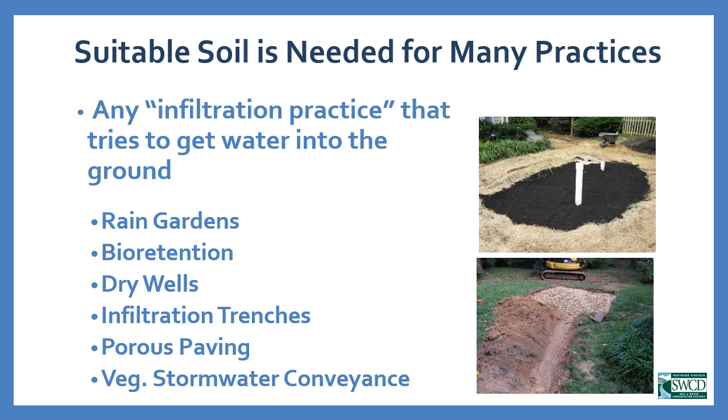The problem we find in this area is that many of our soils are not particularly well suited, for a variety of reasons. One of the most common is density. In urban areas, all urban areas, not just ours, we generally tend to have a lot of dense, compacted soil because that soil has been graded, run over by heavy machinery, and packed back down. What results is a very dense material that will allow some water to pass through, but generally at a much slower rate than the natural soil that was there before development.

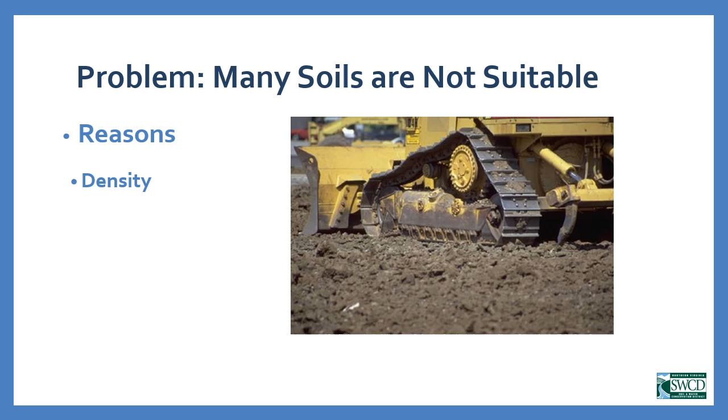Certain areas have very shallow bedrock, meaning you don't have to dig down very far from the surface in order to hit that rock. This can be a real problem if you want to build a rain garden or a dry well, because you need a certain distance of soil that the water will pass through in order to be properly filtered. If you have bedrock within a couple feet of the surface, you won't get that necessary distance.

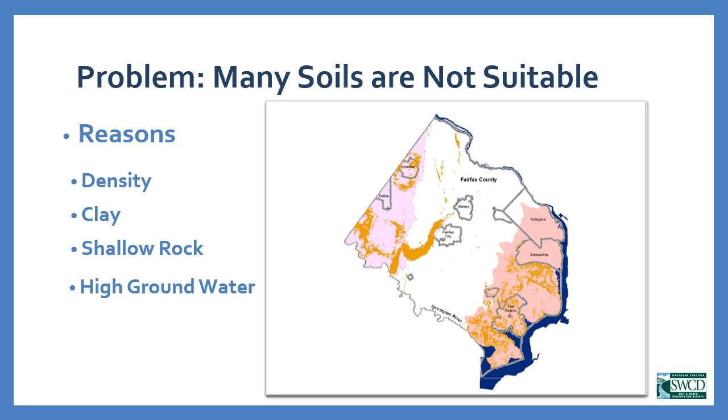We also have high groundwater. In the southeastern areas of the county, in basically all of the city of Alexandria and in a good portion of Arlington, you will find wide swaths of area that have shallow groundwater. You only have to dig down a couple feet in order to see saturation. Because you need the surface runoff to percolate through several feet of good dry soil first, that makes these wet, high groundwater soils not particularly well suited for rain gardens, dry wells, or porous paving.

You also have areas of flooding. These would be areas around our major streams, within the floodplains next to those streams. After every heavy rain, you might have surface water rushing over the surface in large volume at a high speed, and obviously this is a really bad spot to put a rain garden or a dry well.

Again, with all of these things I'm showing on the map, I'm showing some specific areas where you are very likely to find these problems, but that's not to say these are the only areas where you'll find problems with density, clay, shallow rock, high groundwater, or flooding. It's also not to say you can't find a suitable area within the city of Alexandria, for instance, for a rain garden. Maybe you will find that dry soil. So this is a very general map.

There, of course, are going to be exceptions to this map, both in the positive direction and in the negative direction. But generally, this gives you an idea of some of the problem areas that we have within Northern Virginia. And this should also give the idea that a rain garden, a dry well, a bioretention, an infiltration trench really has to be sited correctly in order to work. There's a lot of limitations out there that will make a site not particularly well suited for any one of those practices.

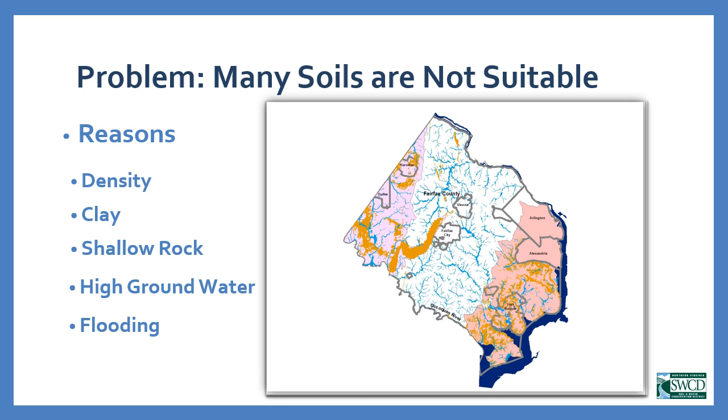So what do you do if you have a client that comes to you and is interested in an infiltration project, like let's say a rain garden? Well, you really do have to examine the site to determine if a rain garden would really work for them. And there's 3 steps to this examination.

Step 1 is to use the soil maps to figure out what soil types are mapped on their property and whether those soil types are indeed suitable for that rain garden.

Step 2 is to observe the site. Head out to the site, look around, look at the topography, look at where water is flowing, where it's pooling, and that'll help you narrow down potentially good areas on the property for that rain garden.

And then finally, there's step 3, field verification. Once you've narrowed down those potentially good areas through observation, you need to start digging. Pull out the shovel, pull out the auger, pull out the post hole digger, and actually take a look at the soil in the field to see if it truly is suitable for that rain garden.

You'll notice I put a big asterisk next to the title of the slide. That's because in many, if not most cases with the VCAP applicants, these 3 steps will be done for you before you even get on the scene. Because when a new VCAP applicant first starts out in the VCAP application process, the first thing that they submit to our office is a site visit request.

In that site visit request, they will say what kind of projects they're interested in. We will then look up the soil maps, the soil type on their property to determine if the soils that are mapped there are indeed suitable for the projects that they have an interest in.

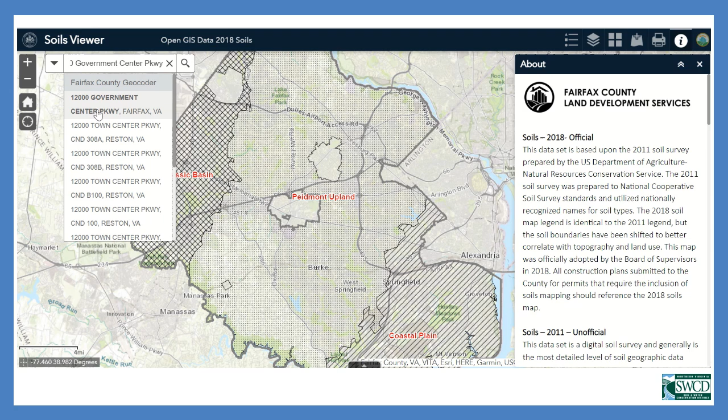Basically, what you want to do at this point is type in the address for your client in the top left here. I'm going to use as an example the Government Center complex, 12,000 Government Center Parkway. You can hit the little magnifying lens here or find the address in the drop-down menu, and it'll zoom right into there.

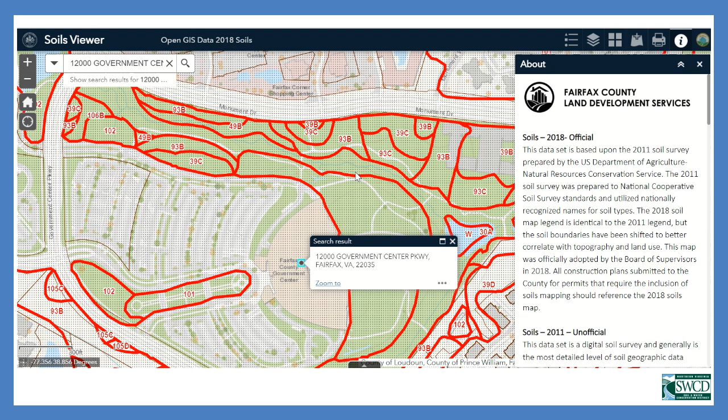And here we are at the Government Center. What you'll see on this map as I scroll around, all the thick red lines, those are the various soil types. So those red lines are actually the boundaries of the various soil types. Let me close out of this, minimize that. So you see we got soil type 102 right here. We got soil type 39C. We got soil type 93B.

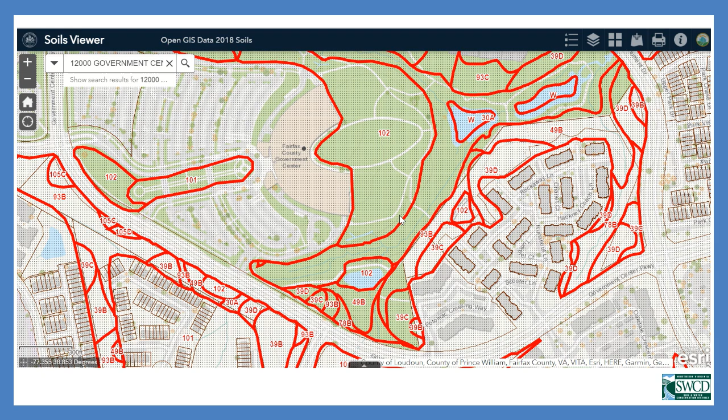So next what you want to do is zoom to the area that you are proposing as the site for that rain garden. Let's say, just for the sake of argument, that we were going to put a rain garden just below the driveway here, so right about there. When you click on the map, it'll bring up a series of little data tabs. Some of these will be the soils data you are looking for, some of them will not be. In this case, it brought up the general parcel report first.

I'm not interested in that, but you can see this is 1 out of 4 pages of data tabs. So all you have to do is just click this little arrow at the top, which will take you to the next. Here's our soils information. So if you don't see the soils information immediately, just click on one of those arrows at the top of the tab, and it'll eventually take you to the soils page.

So this is telling us that the soil type is 30A. That's the alphanumeric legend code. It doesn't tell us much. But to figure out what that soil type is, you click on the More Info button, the Description and Interpretive Guide to Soils. This will take you to a PDF that has a description of all the soil types mapped in Fairfax County, including soil type 30A. It'll have ratings tables, suitability tables, as well as just a little paragraph description of each of the soil types. We will click on that in a second, but the first thing I wanted to show you was the soil property rating down here.

We can click on the little arrow next to it, and it'll give us the soil's name. So soil type 30A in common English is Codorus and Hatboro soils. Still doesn't tell us all that much, so we still have to click one more time, and it'll bring up a little bit of a data table. So again, the soil name, Codorus and Hatboro. The soil number is 30, as we saw. It tells you such things as the problem class, the soil's hydrologic group, the surface K erosion factor, things that probably are not of much use or interest to you. But if you scroll down, you will find some interesting stuff.

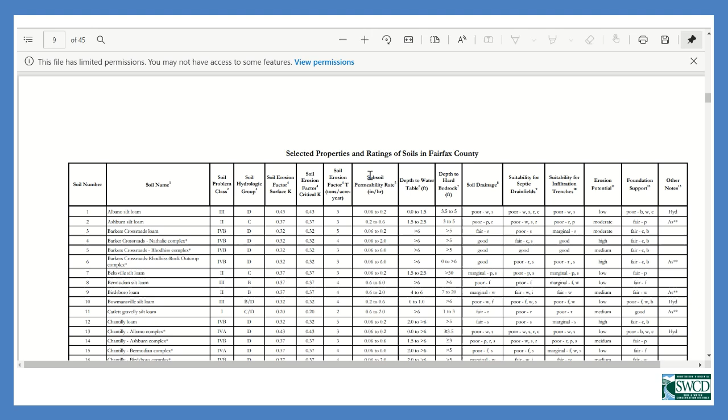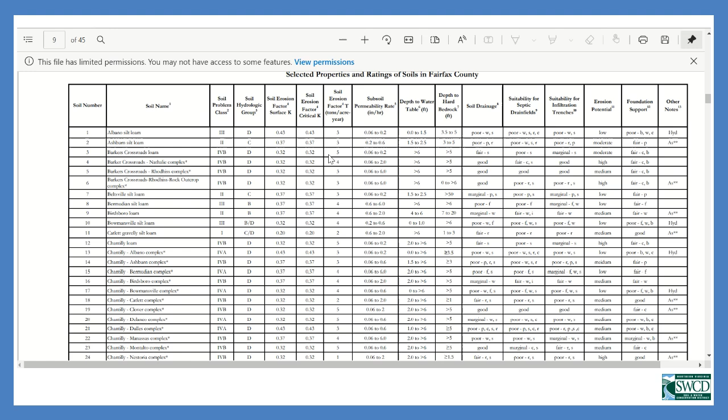This will take you to a pretty long PDF, called the Description and Interpretive Guide to Soils in Fairfax County. The first couple pages tell you a little bit about the soil maps, the soil survey, how they were made, the general geology of Fairfax County, the physiographic provinces, which are different areas of unique geology. And then you get to this big data table, which shows all of the soil types mapped in Fairfax County. If you remember, the one we were looking at was soil type 30, Codorus and Hatboro soils.

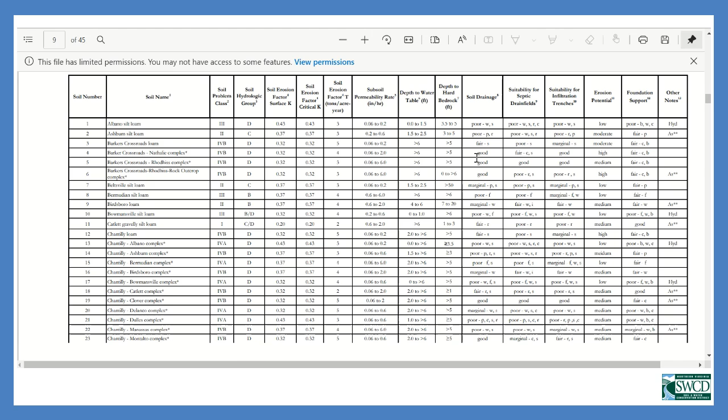All of this data right here is the same as what was pulled up on that data tab. So for instance, depth to the water table, 0 to 2 feet. Soil drainage, poor. Suitability for septic drain fields, poor. Suitability for infiltration trenches, poor. Same stuff, here it's just showing it in the full data tab format.

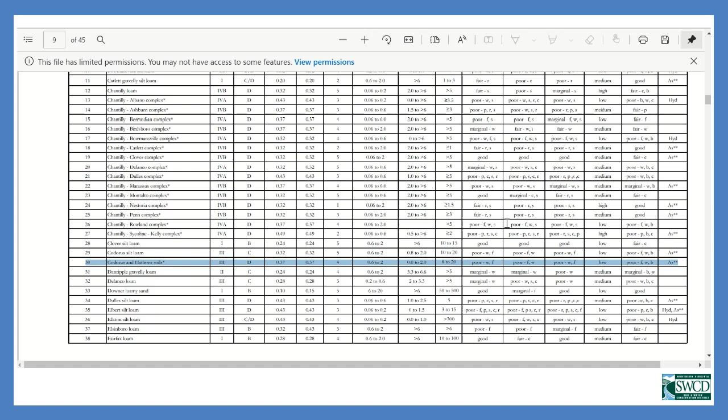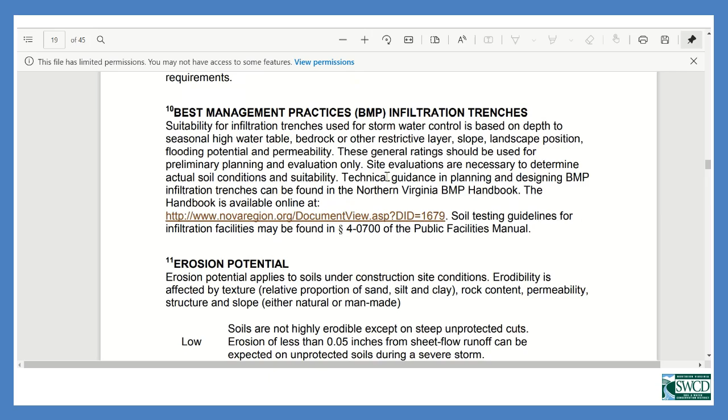If you scroll down from there, what you'll also find is a section of this guide which goes through and provides a short paragraph explanation of each of these soil types. So I'm going to scroll down to soil type 30. Here we are, Codorus and Hatboro soils.

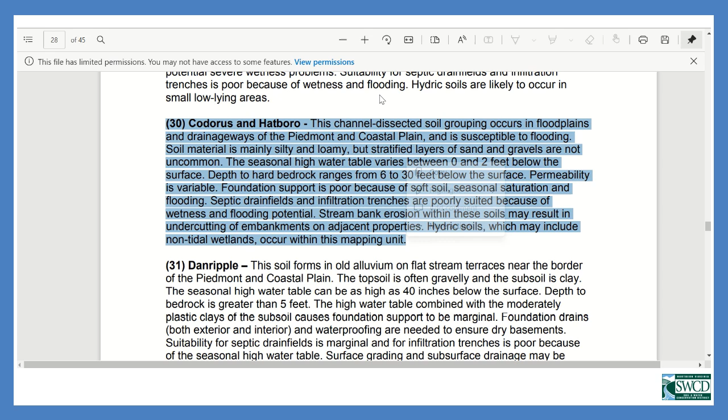Here's just in plain English, or as plain as we can make it, what this soil is about. This channel dissected soil grouping occurs in floodplains and drainage ways of the Piedmont and coastal plain and is susceptible to flooding. Soil material is mainly silty and loamy, but stratified layers of sand and gravels are not uncommon. The seasonal high water table varies between 0 and 2 feet below the surface. Depth of hard bedrock ranges from 6 to 30 feet below the surface. Permeability is variable. Foundation support is poor because of soft soil, seasonal saturation, and flooding.

Septic drain fields and infiltration trenches are poorly suited because of wetness and flooding potential. And there's some other stuff here, and the last sentence might be useful too: hydric soils, which may include non-tidal wetlands, occur within this mapping unit. So basically, if you're thinking of putting a rain garden here, what you are saying is you're thinking of putting a rain garden in a floodplain soil that may have non-tidal wetlands, a water table between 0 and 2 feet below the surface, and variable permeability, and it's susceptible to flooding.

This is not a suitable soil for a rain garden. And if you were looking through the soil maps before going out to see your client, you could pretty much say that there are so many red flags raised by this Codorus and Hatboro soil that you really wouldn't want to put a rain garden, an infiltration trench, or a dry well anywhere close to here. So this is kind of an extreme example, but it does show you what the soil maps can tell you about the soil before you even make it out to the client's property.

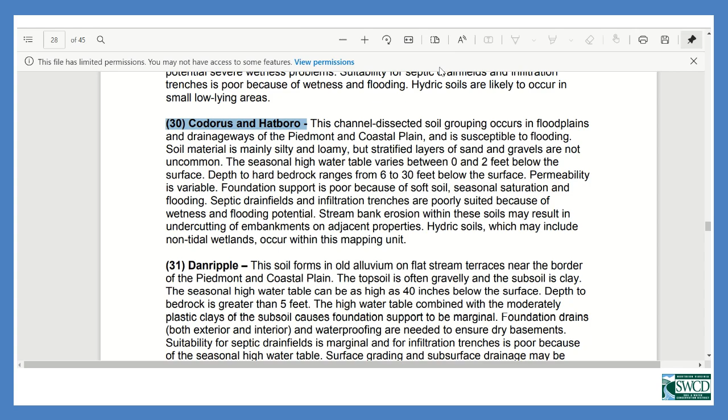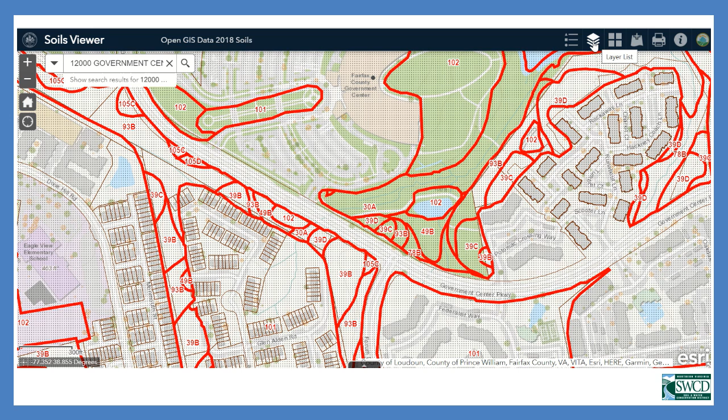As you're working your way through the soils viewer, one other thing to note is that in addition to the basic layers that are automatically loaded when you open the soil survey, you can put more layers on right here. If you click this button, this is the layers list—kind of looks like a sandwich stacked on top of each other.

Here you can see we've got the official 2018 soils maps pulled up, but we also have some of the older ones as well, historic soils maps. So if you wanted to see what was mapped in 2011 or 1990, you can.

There are some other subsets of the soil map which might be useful to you. If you wanted to see areas that used to be mapped as marine clay—areas that have a really sticky, shrinking, swelling type of soil—you can turn that on.

Other areas that have shrinking, swelling, sticky clays but are not marine clay, we've got a layer for that. Then we've got Marumsco soils, which are basically the current name of marine clay. So to see where marine clay is currently mapped, click on the Marumsco soils.

There's an area of the county where there's some potential natural asbestos in the bedrock. You can click on that to see where that would be located—all things that would be useful to know before you start digging.

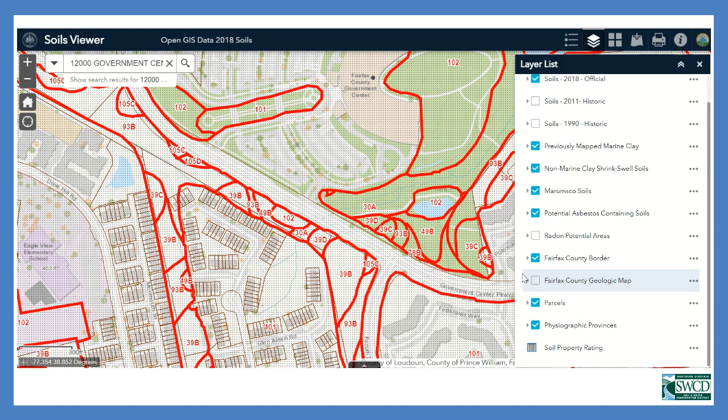It looks like none of those layers are pulling up right here, so obviously none of those types of soil are mapped on the government center property, but they are mapped in other parts of Fairfax County. So that, in a nutshell, is how to use the soils viewer, and I hope it's fairly easy and fairly intuitive.

Now that you have the basic soils information, you can proceed to step 2, which is to make observations of the site. While on site, one thing I always look for is the presence of standing water.

This is often a spot where clients want to put a rain garden, a dry well, or an infiltration trench. Intuitively, it makes sense—where the soil is wet, you'd think you want to put down an infiltration trench to help dry the soil out. But actually, areas of standing water are often the worst spots for an infiltration practice, because that standing water is standing there for a reason.

Maybe the soil is very compacted in that area and just not porous enough to allow storm water to quickly pass through. Maybe it's at a low spot on the yard and perhaps you have a little bit of groundwater coming to the surface.

So oftentimes when you see standing water, that really is not a good place to put a rain garden or a dry well. Take a look at the standing water, ask the client, ask yourself: how long does it stand there? Is the grass stained? Is the vegetation dead? These are both signs of prolonged saturation.

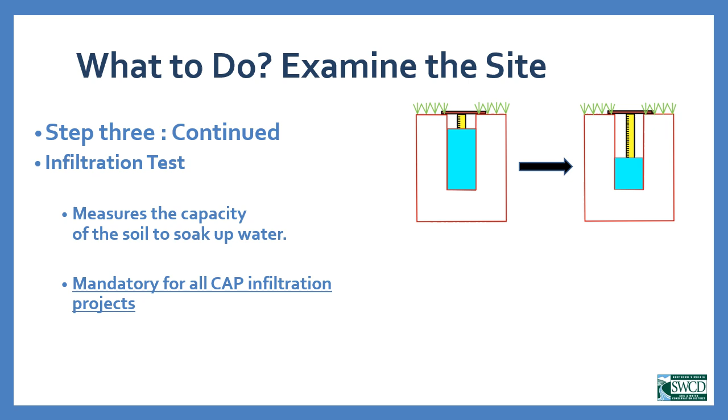Next, we move on to part 2 of the field verification, which is the infiltration test. An infiltration test is a simple test that determines the ability of the soil to absorb water. Conducting an infiltration test is mandatory for any of the infiltration projects that the Conservation Assistance Program can fund.

These projects include rain gardens, permeable pavements, dry wells, infiltration trenches, and bioretention facilities. Basically, if the project temporarily stores stormwater and soaks it into the ground, you have to conduct an infiltration test first, which will determine if the site is really suitable for this type of project.

An infiltration test is quite simple, but it's time consuming. You dig a hole, fill up the hole with water, and then every hour you measure how quickly that water drops. The depth of the test is determined by what type of practice you're hoping to install.

For shallower practices like rain gardens and permeable pavements, the test hole only has to be 12 to 18 inches deep. For deeper practices like dry wells, infiltration trenches, and bioretention facilities, the test hole should be 24 to 36 inches deep. Generally speaking, it's the homeowner or property owner that conducts the test, meaning observes the water and takes the measurements.

We do want to see test data over a 5-hour span, and generally speaking, contractors just don't have that time to spend at their client's property. What we do see, though, is sometimes a contractor will help their client prep the test, meaning dig the hole, especially for some of these deeper tests, like for the dry well or infiltration trench. Some homeowners are not capable of digging a 24 or 36 inch deep hole, so they may rely on their contractor to do that work for them.

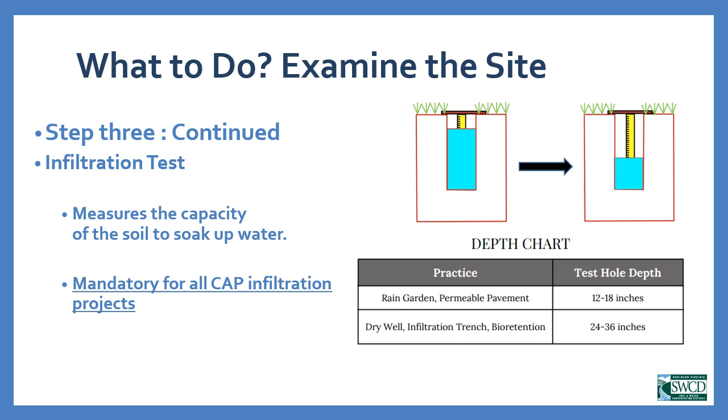Once the hole is dug and filled with water, the homeowner or property owner will take the measurements, the actual infiltration readings. We provide them with a data sheet to fill out. The first thing they fill out is the depth of their hole. In this case, assuming they're putting in a rain garden or permeable pavement, the hole is only 18 inches deep. Moving to the first data column, time.

In the time column, the homeowner puts down the time the infiltration measurement was taken. What is the infiltration measurement? It's basically the distance from the top of the hole to the surface of the water. So the next column is that actual measurement, the distance from the top of the hole to the surface of the water.

In this example, the homeowner took their first reading at 12:30 in the afternoon, and the water was sitting 4 inches from the top of the hole. The next reading was at 1:30, and the water was 6¼ inches from the top of the hole. An hour later at 2:30, it was 7½ inches. An hour later, 8½ inches. An hour later, 9¼ inches, and finally at the last hour of the test, it was 10 inches from the top of the hole.

This is the data that the homeowner or property owner will collect. They send that raw data to us, and the last two columns of the test we calculate ourselves. It's simple math, but for quality control and consistency purposes, we like the homeowner to send their raw data to us so we can determine the drop from hour to hour, the drop in water depth, and finally the infiltration rate, taken as inches per hour.

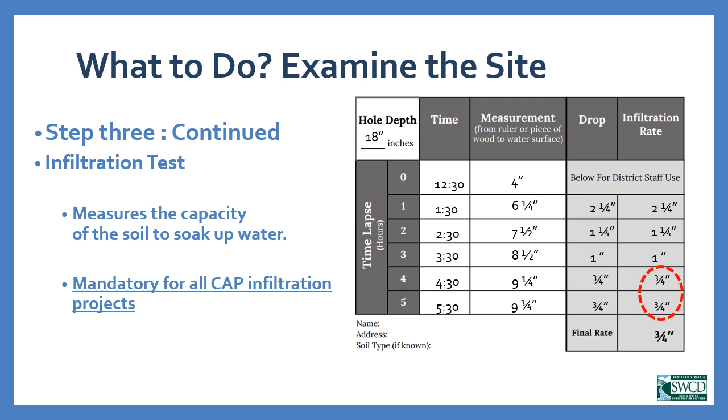Now, every now and then, we don't see a steady state rate. Let's take this example: say in hour 5, instead of measuring 10 inches, our homeowner measured 9¾ inch. That means for the last hour of the test, the drop was not 3/4 inch, it was just 1/2 inch, which also means, since it was a measurement taken over an hour's increment, the infiltration rate for that final hour was also 1/2 inch per hour.

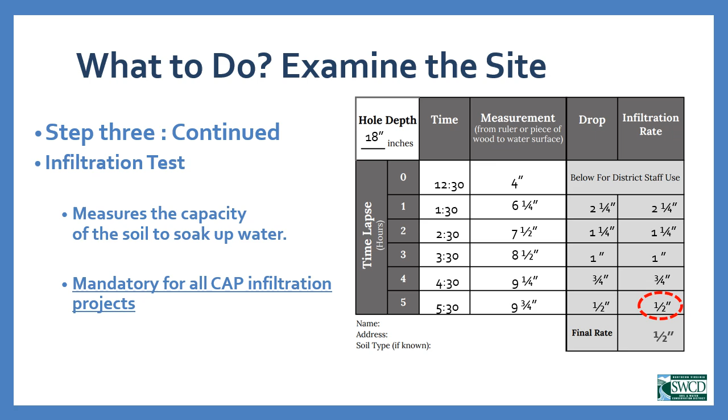Now you can see we don't have a steady state anymore. The infiltration rate continues to drop throughout the duration of the test. If you see something like this, where the test rates do not steady out towards the end, what we do is look for our slowest rate, which is almost always the last hour of the test. Our slowest rate in this case was 1/2 inch per hour. So for this instance, we would set our final rate as that slowest hourly rate, or 1/2 inch per hour.

How do you conduct an infiltration test? Well, you dig a hole with a shovel or a post hole digger to the prescribed depth. For rain gardens and porous paving, that's 12 to 18 inches of depth. For dry wells, infiltration trenches, and bioretention facilities, the hole should be 24 to 36 inches of depth.

Once the hole is dug, you pre-soak it, meaning you fill it up with water. You sit and wait until that water has completely drained out. This saturates the soil at your test site, and you want saturated soil before you take your actual infiltration test measurements.

Next step is to do the actual test itself. You refill the hole, and then over the next 5 hours, you measure how quickly each and every hour that water level drops, how far that water level drops per hour over that 5-hour period. Again, it's generally the homeowner or property owner that takes these readings, but sometimes they'll ask for their contractor's help in prepping the site, digging the hole for them so that they can take those readings.

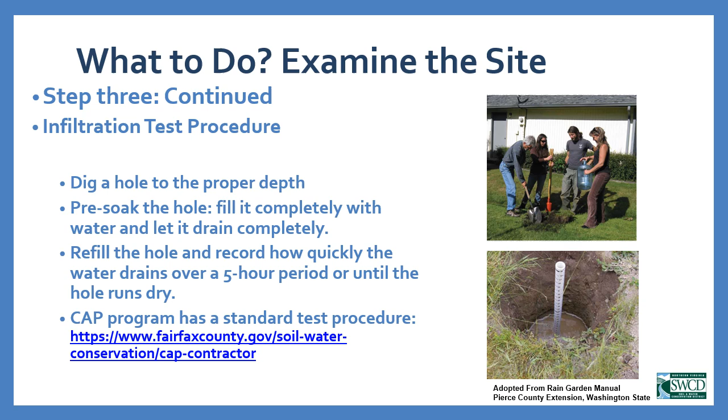The Conservation Assistance Program does have a standard test procedure for setting up the infiltration test and taking the measurements. You can find those standard procedures at www.fairfaxcounty.gov/soil-water-conservation/cap-contractor. On that web page, we have both written instructions and an instructional video, which will walk you step by step through the infiltration test procedures.

So now you've got results. You've got infiltration rates. You've got an analysis of the soil to see if there's any obvious problems like shallow bedrock or shallow water table. What do these results mean?

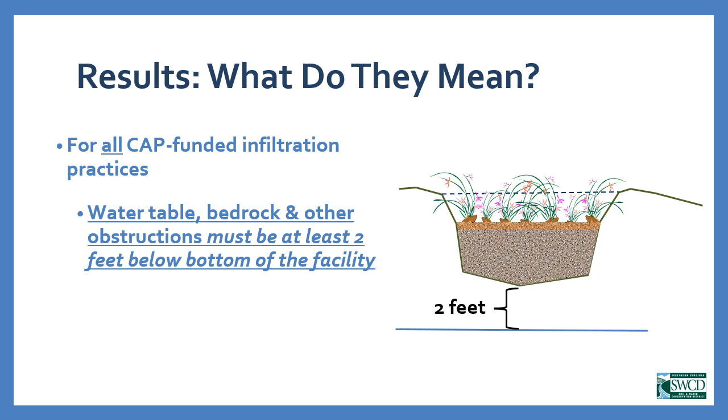We do have design standards for VCAP that apply to all of the infiltration practices, rain gardens, dry wells, etc. So for all VCAP funded infiltration practices, we require at least a 2-foot separation from the bottom of that rain garden, dry well, trench, or porous paving to the top of the bedrock or groundwater. You have to have 2 feet of good dry soil between the bottom of your infiltration facility and the top of the bedrock or groundwater.

For your infiltration results, if you are designing and installing a dry well or an infiltration trench, you need an infiltration rate of at least 0.5 inches per hour. Now there is a little bit of wiggle room on this standard if you're installing an infiltration trench, because if you're slightly below 0.5 inches per hour, you can still install an infiltration trench as long as you also have an underdrain installed.

An underdrain is sort of a perforated overflow drain pipe that is installed either in the center or in the bottom of the infiltration trench, which will allow excess water to drain out during a big storm when that trench is completely filled. So slightly below 0.5 inches per hour is still all right for an infiltration trench, but below that level you are required to install an underdrain. For your dry well, 0.5 inches per hour is a hard and fast rule. If your infiltration rate is below 0.5 inches per hour, you cannot put in a dry well because dry wells are not allowed to have underdrains in them.

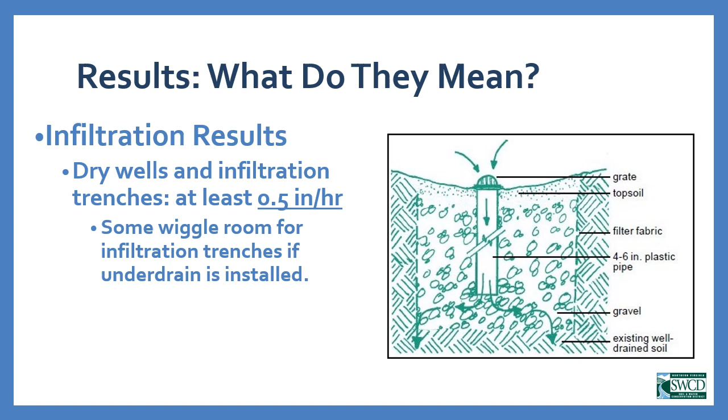If you are thinking of installing porous paving or a bioretention, and a bioretention is just one of those big, fancier, more formally designed rain gardens, you have to install an underdrain if the infiltration rate is below 0.5 inches per hour. So unlike the dry well, you can put in porous paving or bioretention in soil with infiltration rates below 0.5 inches per hour, but below that rate you are required to put in that perforated underdrain. If the rate is significantly below 0.5 inches per hour, you have to use your professional judgment to determine if this really is a suitable site.

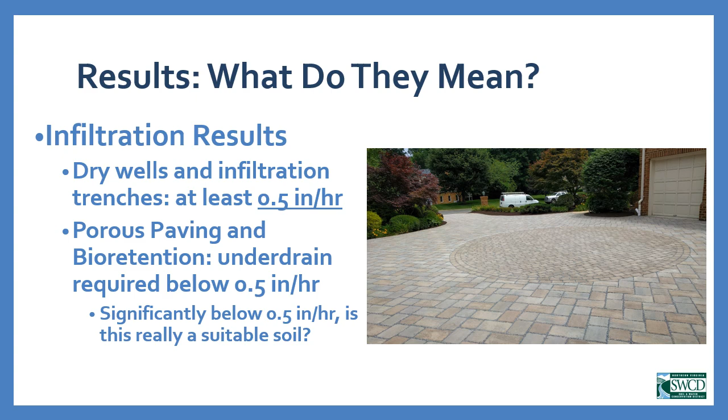Certainly for porous paving, I'd say you can go a little bit lower if you have really slowly permeable soils. Porous paving may still be a pretty good option for those soils. But for a bioretention, you have to consider, if you're dropping down to 0.2 or 0.1 inches per hour for your infiltration rate, is this really a good spot for a bioretention? There's no hard and fast rule to guide you. It's more just a matter of using your best judgment. Is this a project you would have confidence in?

For your rain gardens—which is probably next to dry wells, rain gardens and dry wells are probably our most commonly installed infiltration practices through the VCAP program—if your infiltration rate is greater than 0.5 inches per hour, the only thing you are required to do at a minimum is mix in or amend compost into the natural soil.

So basically you dig out the ponding depth at the top of your rain garden, you have the natural soil below that, and you till in compost to make it a little more permeable. That's if the infiltration rate is greater than 0.5 inches per hour. If it's between 0.5 and 0.25 inches per hour, you need to excavate out the native soil and replace it with engineered rain garden soil media—the commercially available mix you can buy from quarry companies or some of the larger nurseries around here. That stuff is very sandy and generally has a very high infiltration rate.

If you're getting infiltration rates that are really low, less than 0.25 inches per hour, you will need engineered soil media and an underdrain. Both of those are requirements for those slowly permeable soils. Or, again, use your best professional judgment and consider if this really is a good location for a rain garden. If you're getting 0.1 or 0.2 inches per hour, is that a site where you really should be putting a rain garden? Perhaps the answer is yes, but certainly ask yourself that.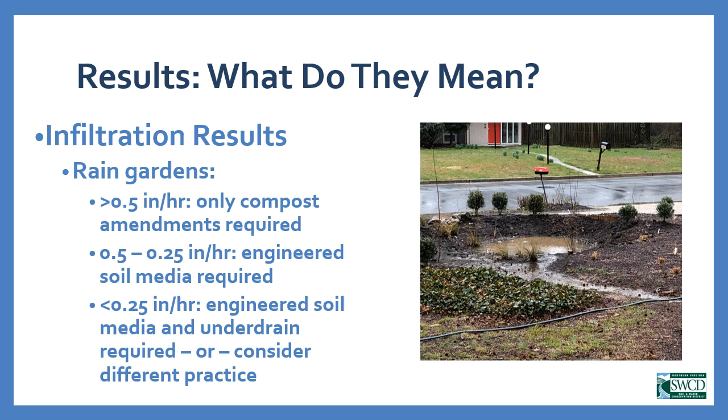And lastly, we have the dry swale. You may not be familiar with this one—it's not a project that has been too common through VCAP. We've seen a couple installed in the last year or so, and their popularity seems to be increasing. So it may be something you see in the future, or something one of your clients mentions to you.

A dry swale is basically a long linear rain garden that is meant to both soak up rainwater and convey stormwater from one point to the next, and it often has a few check dams along its length to help pool stormwater and allow it to soak into the ground. If you're considering a dry swale and your infiltration rate is greater than 0.5 inches per hour, the only thing required is to mix compost amendments into the natural soil to make it a little more porous. That's your only requirement at that point.

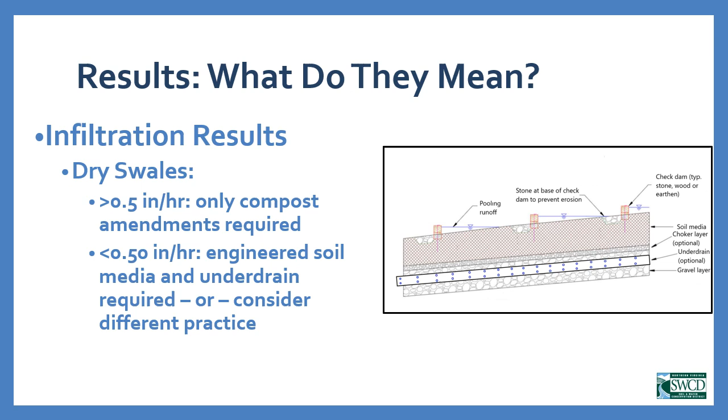If your infiltration rates are less than 0.5 inches per hour, a dry swale requires engineered soil media and an underdrain. You'll have to excavate and remove the natural soil, bring in that sandy engineered rain garden soil mix from a local supplier, and put a perforated underdrain down near the bottom of the practice. Again, if the infiltration rate is significantly below 0.5 inches per hour—0.1, 0.2 inches per hour, something like that—you do have to consider whether this is the right location soil-wise for that dry swale.

Whether it's a dry swale or any of the other infiltration practices I mentioned previously, a continuing theme is to always rely on your good professional judgment. So I've given you the basic minimum requirements for designing and installing these practices in soils of differing infiltration rates.

But if the site is making you nervous, if the infiltration rate is so low that you just don't have confidence that a rain garden, a dry well, a dry swale, or an infiltration trench would work well on this site, if some red flags are raised, then by all means bring that up with your client that you don't think this is a suitable soil for what they are trying to install. Remember, the VCAP applicant, the homeowner, is responsible for maintaining this project over 10 years, so you want to put in projects that will be easy for a non-technical homeowner to maintain over a decade. Always rely on your good professional judgment when dealing with slowly permeable soils.

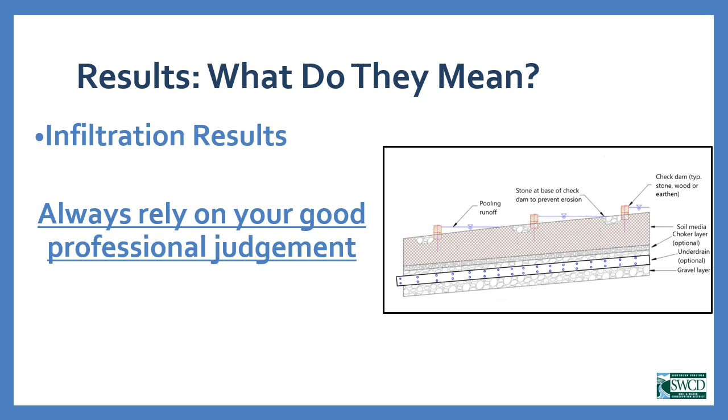For my last slide, I wanted to put up again some of those important links to information I mentioned earlier. The links to the Fairfax County digital soil maps, as well as instructions for running an infiltration test, can be found at the VCAP program page, with the URL shown below. All of the infiltration test minimums and design specs that kick in as a result of those minimums are also summarized on the infiltration test instruction PDF. So if you can't remember whether you have to put in an underdrain because you have a 0.6 inch per hour infiltration rate on your potential rain garden site, that information is included with the infiltration test instructions, all in one PDF.

If you are working in the city of Fairfax, the city of Alexandria, or any other jurisdiction outside of Fairfax County, the link to soil maps for just about every jurisdiction in the United States can be found at the U.S. Department of Agriculture's Web Soil Survey, with the URL shown at the bottom of the slide. Finally, if you're out at a client's property and something about the soil is puzzling you, feel free to contact me and I'll do my best to help. My email is dan.schwartz@fairfaxcounty.gov, and my desk number is 703-324-1422. Feel free to send those difficult soil questions my way.

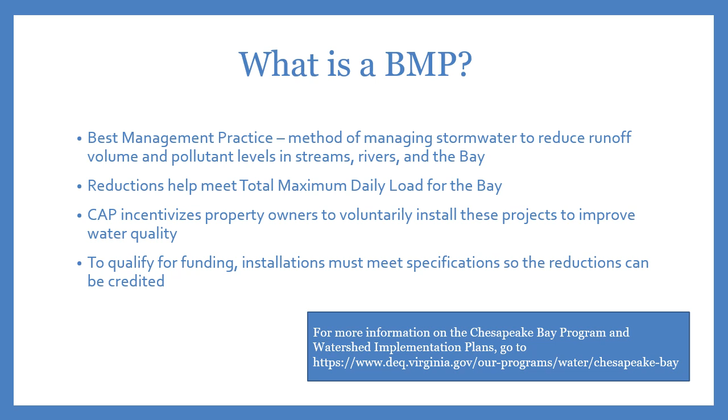A best management practice is a method of managing stormwater that reduces runoff volume and pollutant levels in our streams, rivers, and the Chesapeake Bay. States in the Chesapeake Bay watershed have to meet total maximum daily load goals, and BMPs are one way to do that. There are construction specifications for the BMPs described in the VCAP design manual, with additional information in the Virginia Stormwater Management Handbook, published by the Department of Environmental Quality.

There are 12 BMP types eligible for cost share through the Conservation Assistance Program. We're going to go over 6 of these in more detail, as they are the most common practices installed through the Northern Virginia Soil and Water Conservation Districts Program. More information about the other 6 can be found in the VCAP design manual. There are also training videos available for each practice type on the Virginia Association of Soil and Water Conservation Districts website.

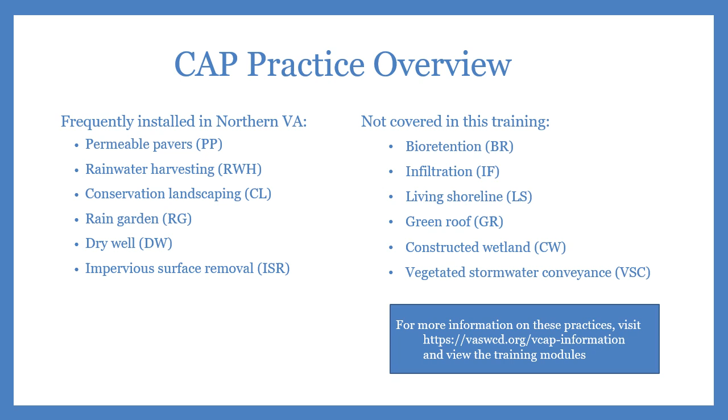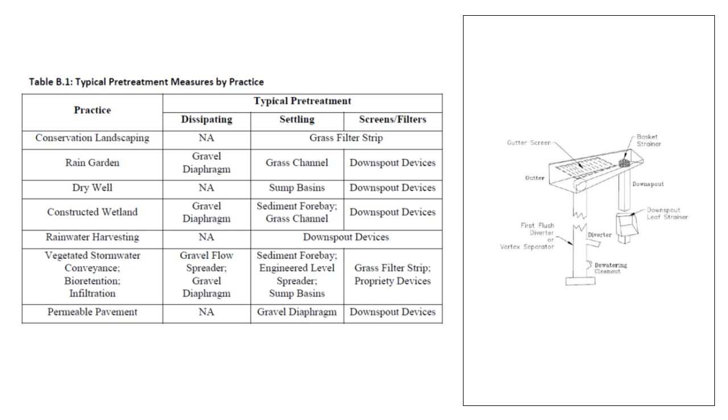In these practice overviews, you will see the term pretreatment mentioned several times. Pretreatment is a necessary component of many stormwater BMPs. Pretreatment techniques protect a BMP from the buildup of trash and sediment and dissipate the energy of the water as it enters the practice. If a BMP is sensitive to buildup of fine sediments, or if the drainage area will produce a lot of sediment, pretreatment will be required. There are 3 types of pretreatment: dissipators, settling devices, and screens or filters. Settling devices and dissipators are usually installed where runoff enters the BMP, while screens and filters are located on downspouts. The diagram on the right shows examples of downspout devices.

The first practice we're going to look at is permeable pavement. This practice is meant to help manage runoff by removing an impervious surface and replacing it with a pervious one. It can also be designed to capture additional impervious runoff from a nearby roof downspout by providing additional storage depth in the reservoir.

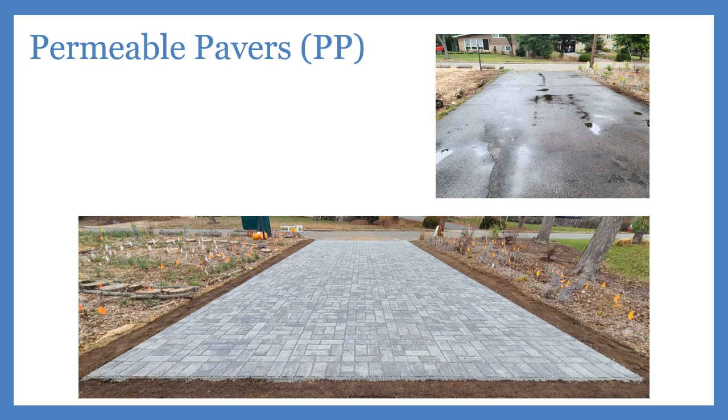Storage reservoir depth will be determined in part by the volume of runoff captured in a 1-inch storm, and also by the manufacturer's specifications for the product. For example, in a 1-inch storm, if you calculate the required storage depth being 4 inches, but the manufacturer requires 6 inches of reservoir for stability reasons, you have to go with 6 inches. Or the other way around, the manufacturer requires 6 inches, but you calculate 8 inches needed for capturing the 1-inch storm, you have to go with the 8-inch depth.

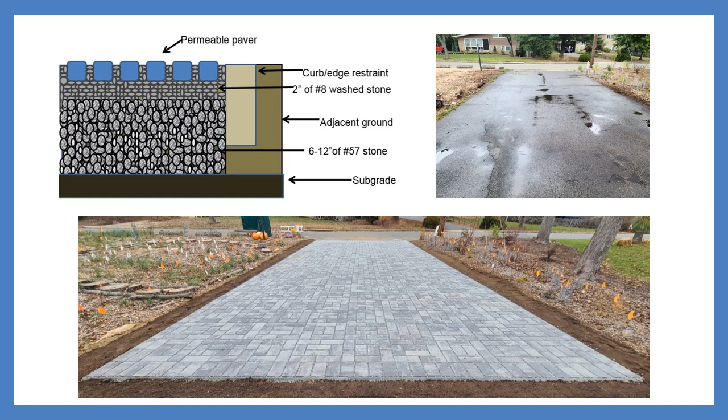This cross-section is an example of what needs to be provided with the design plan for the application, and be sure to label it with the actual depth of each gravel layer. The application requirements were covered in more detail in the first video and are on the submission checklist provided to each applicant, but I'll go over each of these very quickly.

The first one is a cross-section diagram with dimensions that we just saw earlier. For the infiltration test, we do need to see the individual timed measurements, not just that final number. Most of the time the property owner is doing this test, but if you are performing it for them, please be sure to provide us that data.

The design plan with the dimensions and area of the BMP - that area is an important one, often left off, and we do need to have that. Also needed: permits, the construction sequence and timing, and a soil stabilization plan, especially important if you're going to have soil that is not covered for more than just a few days. Also sizing calculations with the contributing drainage area map showing pervious and impervious area being treated.

For this one, you can use an aerial map and outline the contributing drainage areas - in other words, the roof or the driveway, and any pervious area that will be draining to it. We'll need that materials list, an itemized cost estimate, and a maintenance plan. On the right side are those eligible costs that can be included.

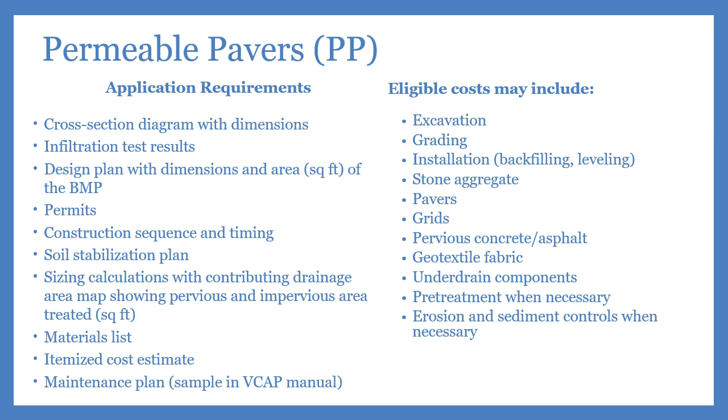Rainwater harvesting is another practice for reducing impervious surface runoff. VCAP requires that at least 250 gallons of runoff is captured, but this can be divided among multiple downspouts - it does not have to be one large tank like you see in these photos. This is a 250 gallon tank or cistern in these photos. However, the tank must be sized to capture the runoff generated in a 1-inch storm based on the roof area that drains to the downspout that feeds into the tank.

You must capture at least that amount. So if, for example, 375 gallons of runoff is produced, you must install a tank that size or larger. This means that you might have to oversize the tank, but you cannot undersize it. The diagram on the left shows an example setup - this is a great example of a cross-section of what we would want to see in the application. Also note that pretreatment is a very important part of the installation to keep debris out of the system.

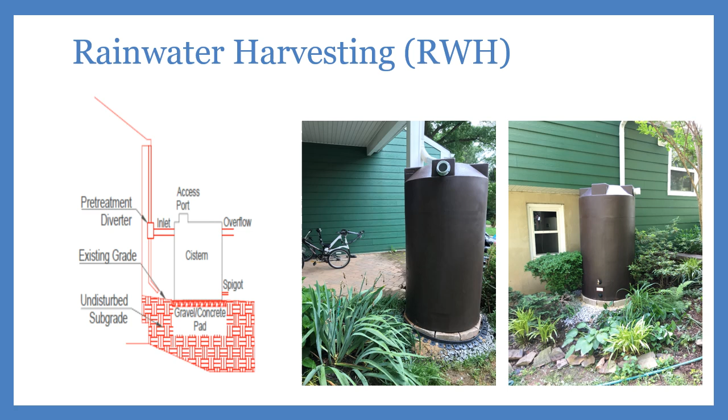Here we have the application requirements for rainwater harvesting, which is pretty similar for all the practices. That includes the design plan, the cost estimate, the sizing calculations. For the eligible costs, of course, we have the cistern, the cost of installation, and also pumps have been added to the list of eligible costs.

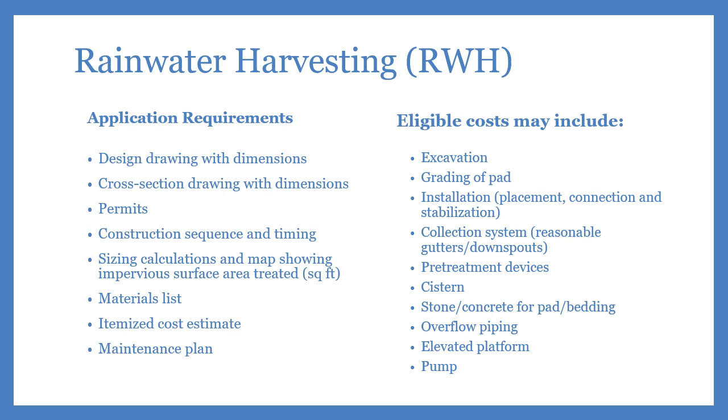Now, the reimbursement rate for rainwater harvesting is a flat dollar amount per gallon rather than the percentage like many of the other practices. The most commonly installed practice in the Northern Virginia Conservation Assistance Programs is conservation landscaping.

It does not have to meet any minimum infiltration rate, but it should be designed to help soak in runoff, therefore reducing the volume of water and the amount of pollutants that make it into the stormwater conveyance system and into nearby streams. It is most often installed in locations where there is poor vegetative cover, or it can be used to replace compacted turf where there is excess runoff. It is not meant for replanting existing plant beds, even if they are non-native.

There are 5 subtypes of conservation landscaping. A meadow is in an open space and is free of woody plants. Meadows over 1,000 square feet in size are preferred to be established by seed, unless plugs are required for the success of the installation. Tree planting should be done with bare root seedlings. Tree protection measures are required to keep them safe from deer browsing or being accidentally mowed down, and planting a diversity of species is recommended.

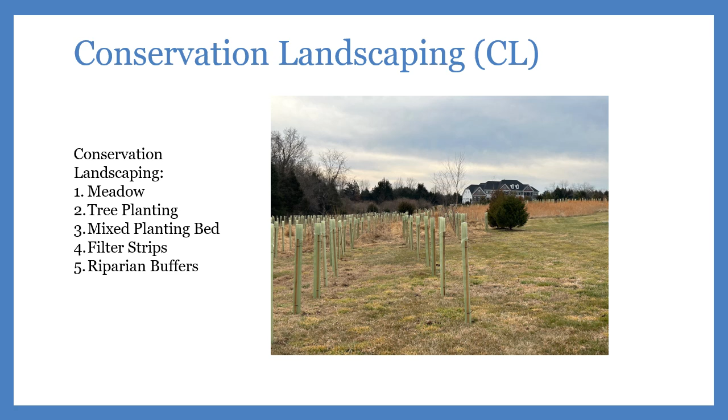A mixed planting bed is the most common type. It does not look like the typical landscape bed of a few shrubs surrounded by mulch. VCAP requires a minimum planting density of 75%, based on mature plant spread, not the size at the time of planting. A light layer of mulch should be used to protect soil until plants fill in, with the expectation that those plants will entirely fill the space in about 3 years.

Another design feature to keep in mind is that it needs to be designed to soak in water, so the bed should be slightly lower than the surrounding area. Mulch should not be mounded up, as that will cause it to shed runoff.

The next one, filter strips, intercept impervious sheet runoff and have a minimum required length and width, which will vary based on the slope of the area. It can be planted either as a meadow or a mixed bed. And last, riparian buffers are meadows, tree plantings, or mixed planting beds established along a stream or a pond edge.

More criteria for all of these can be found in the VCAP manual. The application requirements for conservation landscaping are a little simpler than the other practices. For example, there's no sizing calculation for stormwater capture and no cross-section diagram needed.

The eligible costs are for components that are necessary for the function and success of the project, so anything that is decorative cannot be cost shared. A lot of times this includes things like stepping stones and boulders. They can be used in the design, but they're generally not a reimbursable expense. So if they're going to be part of the cost, they should be itemized, both the material and the labor, so staff can remove those costs for consideration if needed.

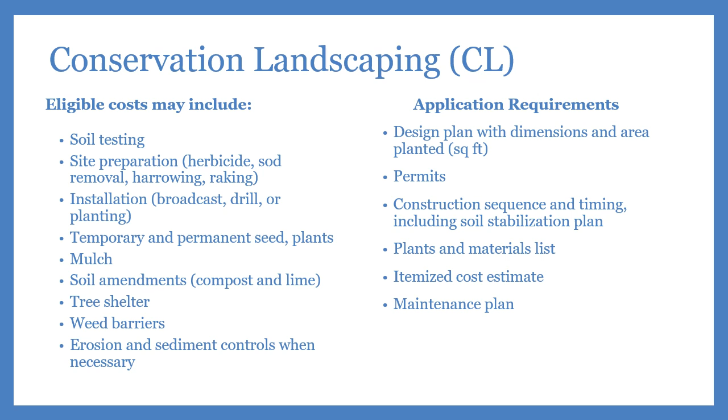A rain garden is another popular practice in VCAP. A rain garden can be used to manage excess runoff or to help with erosion by providing a place for concentrated runoff to pool and soak in. The soil should have a suitable infiltration rate of at least a half inch per hour, though an otherwise suitable location may get away with a slightly lower rate if an engineered soil media is used or perhaps an underdrain is installed. In VCAP, a rain garden should receive impervious runoff.

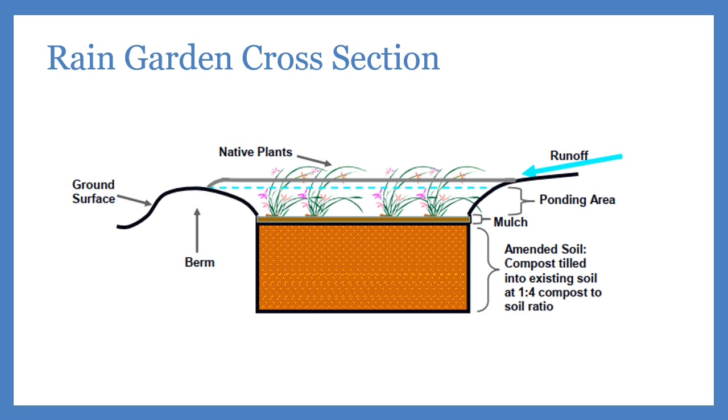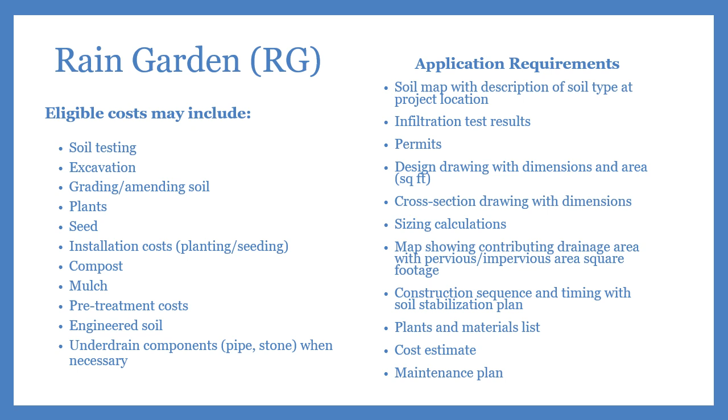If you are using our rain garden sizing spreadsheet, the calculated surface area refers to this flat bottom area. You will also notice in this diagram above the mulch layer that the side walls are sloped out, so the actual surface area of the rain garden will be larger than the bottom of the basin. Just like with the other practices, we have application requirements: the design drawing with the area, your cross-section, infiltration test results, sizing calculations, your cost estimate, materials list, and your plant list, of course, of only Virginia native plants.

A dry well would be installed to treat the same types of resource concerns as a rain garden, excess runoff and/or erosion, but it provides subsurface storage and is a good option for properties that don't have enough space for a rain garden or for property owners who maybe are not so comfortable with plant maintenance.

On the right is a photo of a dry well during installation. You can see the downspout inflow points, the observation well, and overflow, and in this case the storage area consisted of prefabricated tanks which are surrounded by gravel. The storage area can be just gravel if preferred, which will require it to be larger overall size due to having less void space than a tank or a chamber.

The cross-section on the left is a sample. Again, we need to see where those downspouts are entering the dry well, the depths of the layers. If you have a storage tank in there, show that in there. And of course, that ever important pre-treatment area.

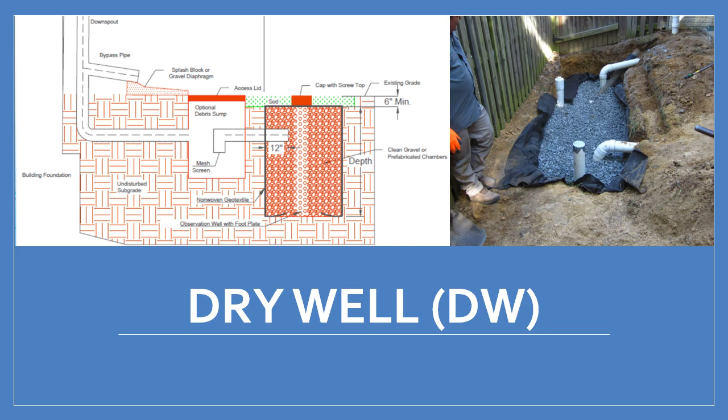Application requirements for the dry well are similar to those we've looked at already. The eligible cost may include the excavation of the area, the gravel or stone used to fill the space, a storage reservoir if you're using one, piping to bring that runoff into the dry well, geotextile fabric, pre-treatment devices, the delivery costs, and seed or sod that will go over the top of the dry well once it's installed.

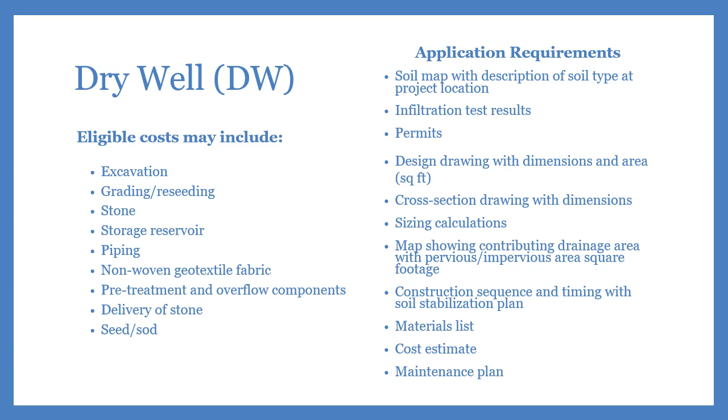The last practice we're discussing is less common but highly impactful: impervious surface removal. Like with permeable pavement, this practice reduces runoff by converting impervious surface to pervious. That impervious surface can be asphalt, concrete, another hard surface like a grouted stone patio, or even compacted gravel, usually referring to something that's been in place for 3 years or longer. That surface gets removed and then gets planted with turf, plants, or conservation landscaping. The important thing is that it must be stabilized with a planted material. It can't just be left bare.

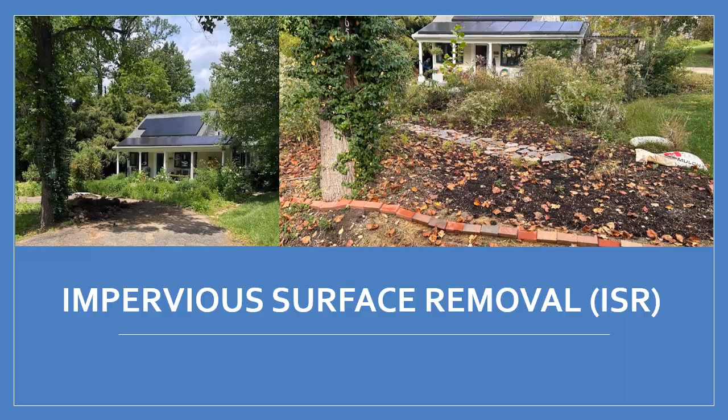Impervious surface removal is cost shared by the square foot, but all of the items under eligible costs can be included in your cost estimate. One thing to note is that the cost share for impervious surface removal is already taken into account for permeable pavement, because permeable pavement is replacing an impermeable surface, so ISR is implied. The cost shares don't get stacked. However, if the impervious surface is being replaced with conservation landscaping—native plants at that 75% density—the project can qualify for both cost shares, ISR and conservation landscaping, in a single application.

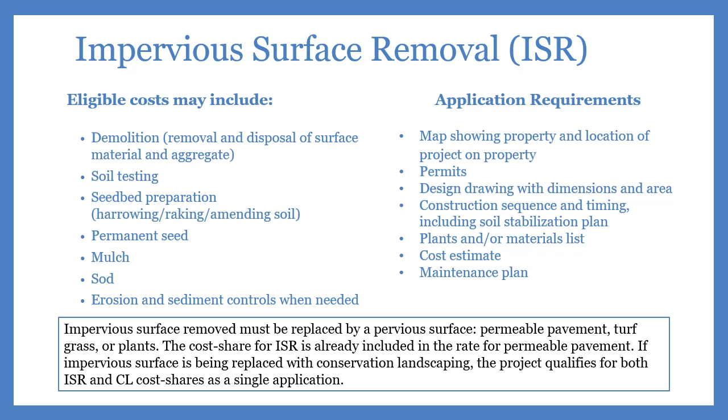As you learned in the first video, there are 4 sizing spreadsheets available on our website that do the hard work of the calculations for you when it comes to determining the size of an infiltration practice. It is not a requirement that you use these, but if you choose not to, you will need to provide your calculations in the design plan.

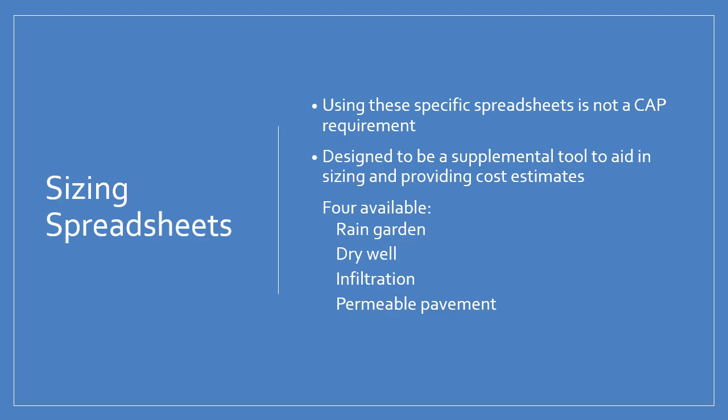Let's have a look at the rain garden sizing spreadsheet, starting with our color key. The yellow cells are our data cells, where you're going to be putting in some numbers. The light blue are the calculation cells, where the spreadsheet is going to be putting in some numbers. And the dark blue are the constant values, already filled in. In this case, it is our 1-inch rainstorm.

So let's start off at the top. This is our contributing drainage area—in other words, our impervious surface and our pervious surface that are contributing to the rain garden. Let's say we have 500 square feet of roof area going to the rain garden and no pervious area. With our 1-inch storm, that gives us about 40 cubic feet of treatment volume.

The next section is for inputting our layers of the rain garden. The first one is the mulch depth. This doesn't actually affect the size of the rain garden, but if you put that number in, it'll help further down in the spreadsheet to calculate your materials. Let's say we have 2 inches of mulch. Our ponding area is next, and that depth will affect the size of the rain garden. Usually we're looking at between 6 and 9 inches in depth, so let's start out with 6.

We come down here to these light blue cells. Our storage depth is 6 inches and our surface area is just under 80 square feet. Again, that is for the bottom basin of the rain garden—it does not include the sloped out area.

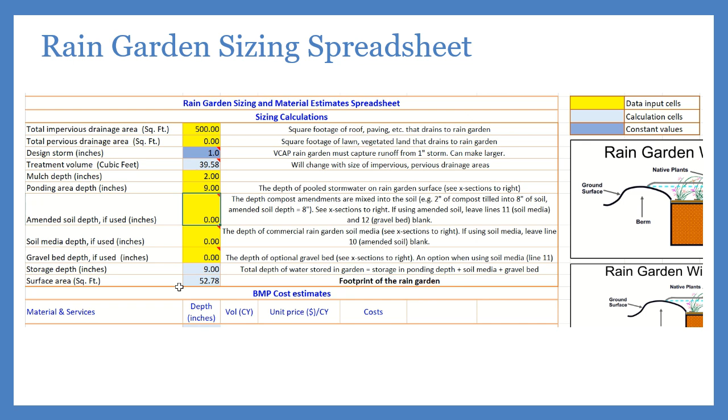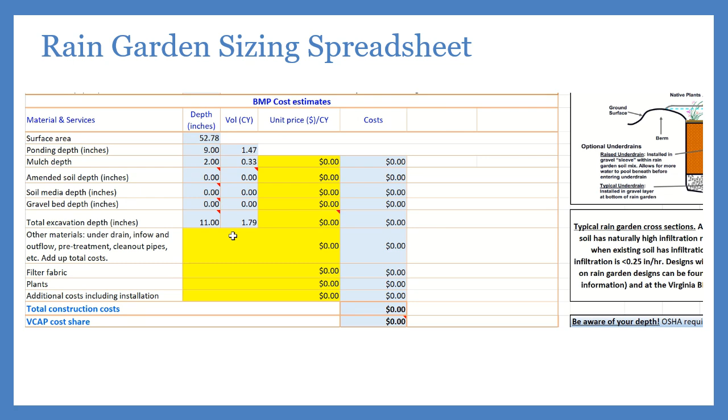Coming down here, as we were talking about, this part of the spreadsheet can help calculate the materials needed, and if you wanted to put in your costs, that would also help calculate your costs. Over on the right side, we have these cross-section diagrams just like we saw earlier. This one actually puts in the depths for you. If we put back that 12 inches of amended soil, that would show back up over here.

You could use that in the application, take a screenshot, just make sure that you are adding in the appropriate inflow and outflow points.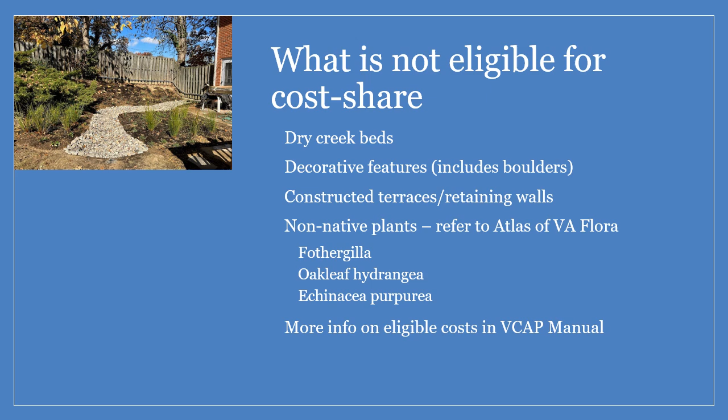The first is dry creek beds. The program wants to see runoff soaking into the soil, and though a dry creek bed might help reduce the energy of runoff, they don't help the water soak into the soil. There are some situations where rock is appropriate, like in this photo, such as protecting the outfall area of a downspout or a culvert, or for guiding downspout runoff into a rain garden. But in conservation landscaping, a densely planted area of sturdy vegetation is preferred.

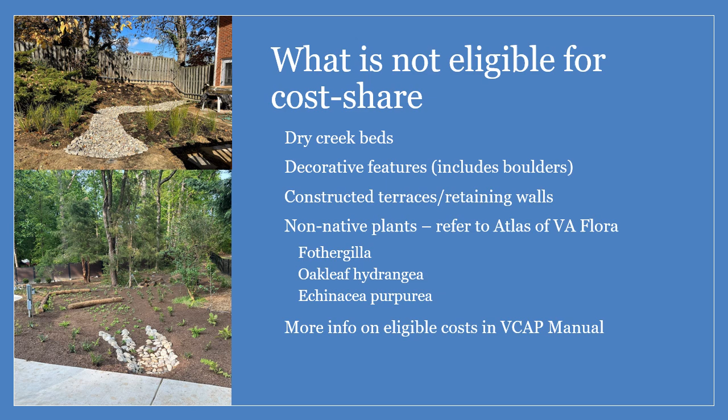Next is decorative features. These can be included in the design, but they cannot be cost shared. In most cases, boulders are going to be seen as decorative rather than functional, so these should either be removed from the cost estimate, or if you're unsure of whether it might qualify, it should be itemized in the cost estimate so staff can subtract the cost if necessary.

The next item is terraces and retaining walls. The program seeks to fund the most cost-effective measures for addressing the resource concern on a property. Coir logs are an example of a low-cost way of creating a terrace that would be eligible for reimbursement, but terraces and stone walls or timber walls would not typically be covered. Again, they can be installed if they're preferred by the client, but they should be excluded from the cost estimate or itemized.

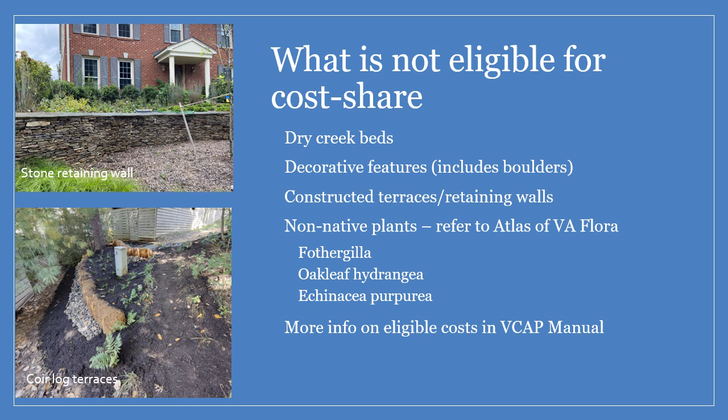Non-native plants, again, cannot be cost shared and should generally not be included in a VCAP designated area. Some species that are commonly believed or accepted to be native, we often see included in plans, but they're not actually native according to the Atlas of the Flora of Virginia, which is the resource the program refers to when determining whether a plant is native.

If you're on that website, it does include plants that are known to have wild populations in the state, both native and non-native, so be sure to open the link for species to view the full distribution map. Red dots mean that it is native, blue means it's introduced, and gray is uncertain. The program does allow some uncertain species to be included in a plan, but please check with staff to confirm. Also, a plant only needs to be native to somewhere in the state of Virginia. It does not have to be native at the county level.

NVSWCD staff do verify each practice installation before submitting for cost share reimbursement. We can't see those underground components at the post-install inspection, so it is important that we confirm everything before it's covered up and too late to fix any issues. This can be done by photos over email, a video chat, or even in person.

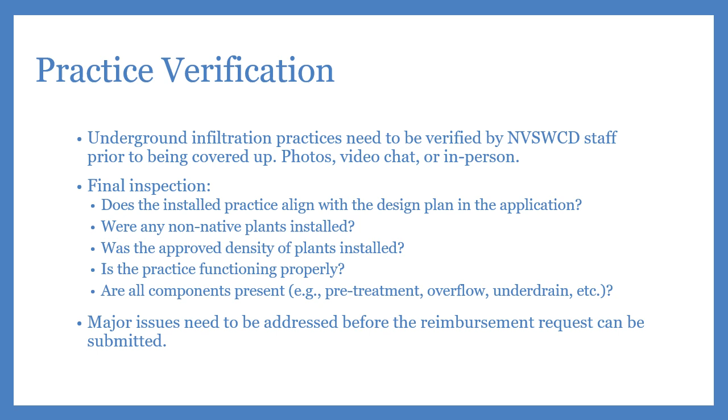At that final inspection, after the installation is complete, we will be looking for several things. Does the installation align with the plan that was submitted? Are there any non-native plants? Is the practice functioning properly? If there is any major deviation from the approved plan, or if there are functionality issues, they will need to be addressed before reimbursement can be requested.

Here we have a few common mistakes that are found at the design or installation phases of an application. The first two are at that design phase. They're pretty easily fixed, but keeping these in mind will reduce the back and forth as we review the application. The first is incorrect practice sizing. Infiltration practices and rainwater harvesting must treat the 1-inch rainstorm. We do have those sizing spreadsheets that are a useful tool, but there are also formulas available in the appendices of the VCAP design manual.

Be sure to use those to get your correct sizing for those practices that need it. The infiltration test is something usually the applicant does on their own, but if you are conducting the test for them, we do need to see the actual recorded measurements for each hour the test is monitored.

The next two are mistakes that we find at the inspection, and those take a bit more time and effort to correct, so we hope to avoid these by talking about them a bit ahead of time.

The first is plant substitutions. It happens frequently that a plant species becomes unavailable sometime between the point of application and the time of installation. Substitutions are perfectly okay, but we ask that either you or your client confirm your new selections with staff prior to installing them, to confirm that they're native.

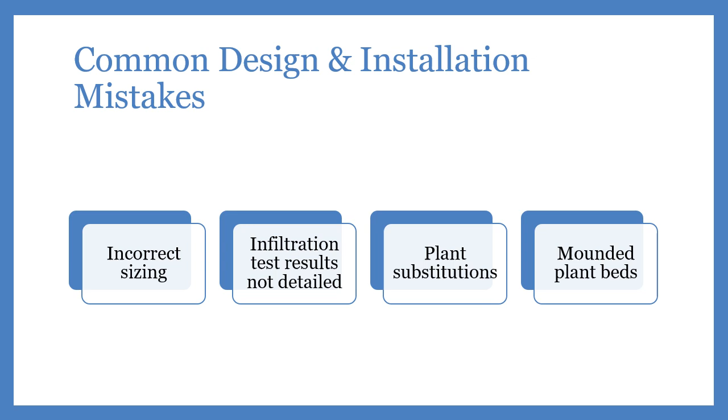The last is mounded plant beds. Rainwater naturally finds its way to the lowest places in a landscape, so if a bed is mounded up, anything that falls on that plant bed is going to shed off to the sides, and any runoff flowing toward it is going to end up going around it. Instead, conservation landscapes in VCAP projects should be slightly lower than the surrounding area so that water that falls on the landscape stays in, and runoff flowing toward it can move through it and soak in.

There's one last topic I'd like to go over, which was already mentioned in the first video: to be considered for funding, an application must achieve a minimum score. The score is calculated by adding points given for meeting objective criteria based on the impact the project would have on water quality. Most infiltration practices will meet the score without any difficulty.

They capture a measurable amount of runoff. However, conservation landscaping may have some difficulty getting that minimum score. There are four site-related criteria that result in having a higher score.

The first is the practice being within 100, or even better, within 40 feet of the stormwater conveyance system - that's the storm drain, the curb gutter, a stream. The next is treating a steep slope. A slope of 15% or more has a higher score, or mitigating impervious runoff to a slope of 15% or more also gets some extra points.

Of the three VCAP resource concerns, erosion receives the most points and excess runoff receives the least, with poor vegetative cover being in the middle of the two.

Runoff that is untreated - meaning runoff from the property that doesn't go into a stormwater facility such as a dry pond or bioretention - also gets additional points.